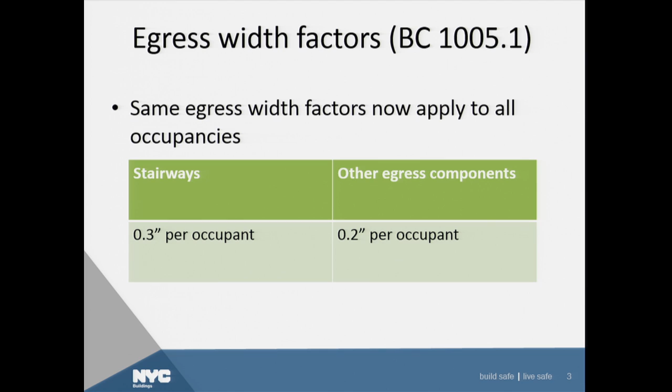So back in 2008, when we did the changes in the code, with the 2003 IBC as the base code, everything was simplified. There were only 2 sets of factors. One set for high hazard occupancies, you have 0.7, and I think the next number is like 0.5 or 0.3, and you have everything else. Well, in the 2009 IBC, it's even more simplified. So now there are only 2 numbers, 0.3 inch per occupant for stairways and 0.2 inch per occupant for other egress components. Simple enough.

Automatic turnstiles were not really clearly addressed in both the 1968 code and 2008 code, but they are very commonly found in a lot of office building lobbies. You'll find them all over the place, basically counting people going in and coming out, but it was never clear if they are really fully legal. So in the 2014 code, we have put in a number of conditions, and we have made it clear that if you can meet all of these conditions, automatic turnstiles can work safely in a building.

So the first requirement is minimum 32 inches for a typical turnstile. That's the width that you measure from 18 inches above the floor and down. And if the automatic turnstile serves an accessible means of egress, then it has to be 36 inches wide, wide enough for a wheelchair to pass through, measured 34 inches off the floor and down. Well, these devices are typically electrically powered. So in case of power failure, there has to be a feature that would allow them to break away. So 13 pounds is the maximum force that you can exert in order to break away these things.

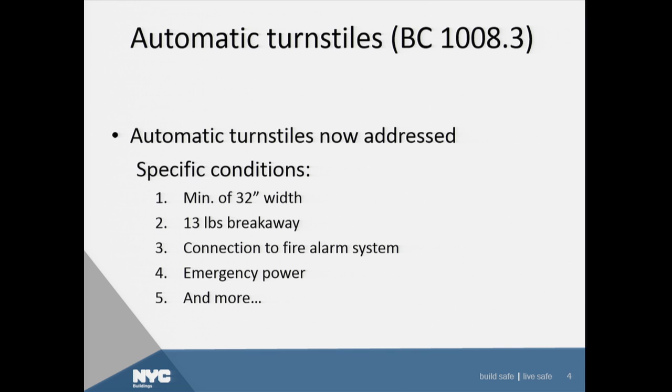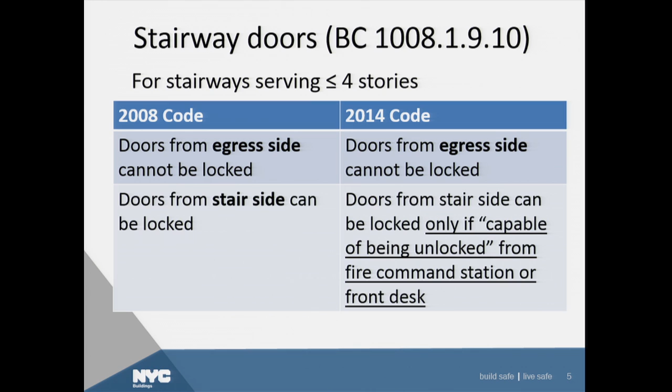However, there's one additional condition. The door from the stair side can only be locked if it's capable of being unlocked from the fire command station, if there's one in the building, or it has to be at a location near the front desk so that the fire department can unlock all these doors when they arrive.

I think James mentioned earlier that there are some handrail requirements in Title 28. So the IBC also made some specific changes to the handrail section. Traditionally, we have what they call the Type 1 handrail, which has a certain diameter allowance, perimeter length, and also dimensional size restrictions, because they are easier to grasp. These are the Type 1 that are allowed for most of the occupancies.

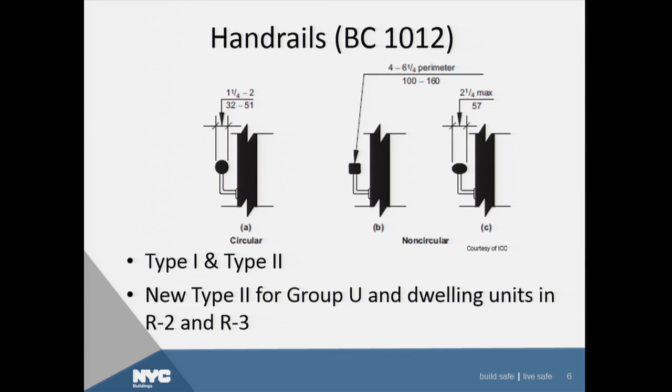But there is now an allowance for what they call a Type 2. Type 2 has a more elaborate profile, commonly found within dwelling units. So they're allowed in R2 and R3 dwelling units, and also Group U utility occupancies.

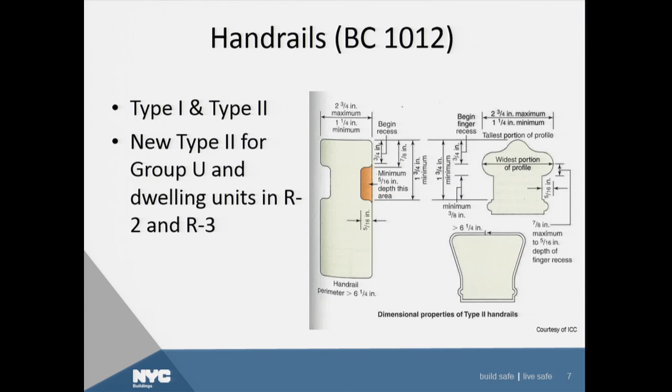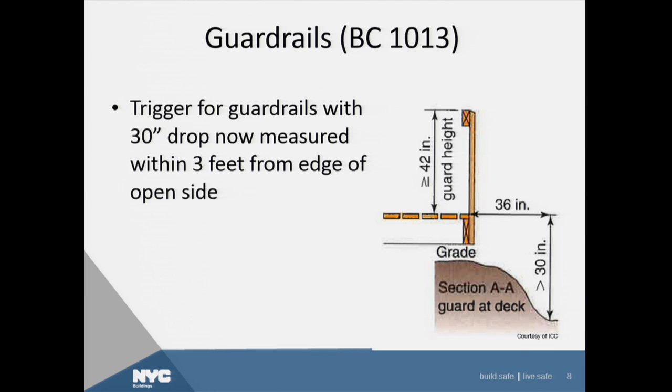Now, before the 2014 code, in the 2008 code, there was already this requirement of having guardrails when there's a 30-inch drop, when you are near a walking surface, a ramp, a landing, a platform, what have you. But it was never clear before how you measure that 30-inch drop. Do you measure right up against the edge of the platform? Do you measure a foot away? Do you measure 10 feet away? So the 2014 code now made it clear that the 30-inch drop is measured within 36 inches from the edge of that walking surface.

Now, I mentioned before that when the Egress Committee worked on this chapter, we also recognized a lot of design challenges and new technologies. This is one of those. It is pretty common when you see a larger tenant, like a mall or a larger mercantile occupancy, within which you'll find a small pharmacy, maybe a small coffee shop. And those spaces typically are serving the same patrons. The assumption is that they're just shopping and having a cup of coffee, and should something happen, they would know where to come back to.

So now there's an allowance for that type of smaller tenant space to exit through a larger adjoining Group M mercantile occupancy, because otherwise the code explicitly prohibits you from going through a next door tenant space to get out of the building. So here's an allowance. There's some limitation. It has to be no more than 10% of the larger tenant. Like I said before, it has to be a Group M. And there has to be a discernible path from inside that smaller space. I would know which door I should take in order to get back into the Group M. And of course, the door can't be locked during business hours, and must be serving the same patrons.

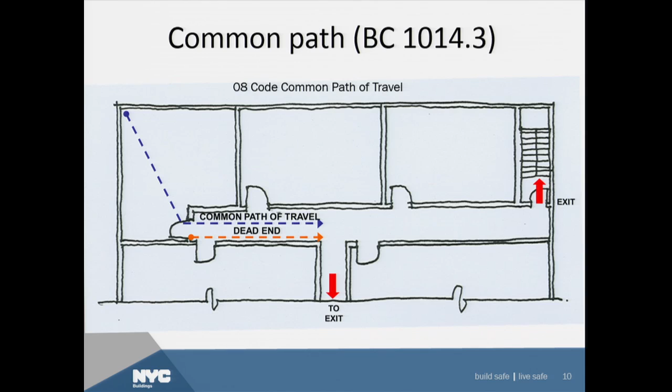By the way, the common path of travel distance is measured to the point at which you can go to one exit or the other. Dead end distance, on the other hand, is where you are traveling in one direction towards an exit. So the two don't really work together. So what we did in the 2014 code is extend that common path to 125 feet for R2 occupancy, provided the building is fully sprinklered. So now the 125 feet common path works nicely with the 80 feet dead end.

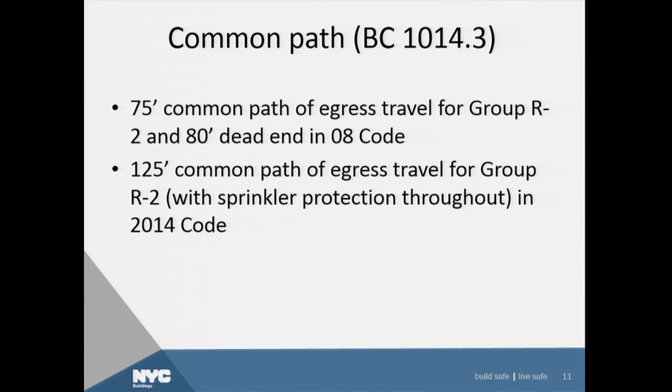The 2008 code required an intervening hall when you are designing an R2 occupancy. The whole idea of the intervening hall is that there is a buffer zone so that when there's a smoke condition, either inside the apartment or in the stairway, one thing won't contaminate the other. So there are some allowances for smaller buildings that they don't have to have the intervening hall. And those exceptions are maintained in the 2014 code.

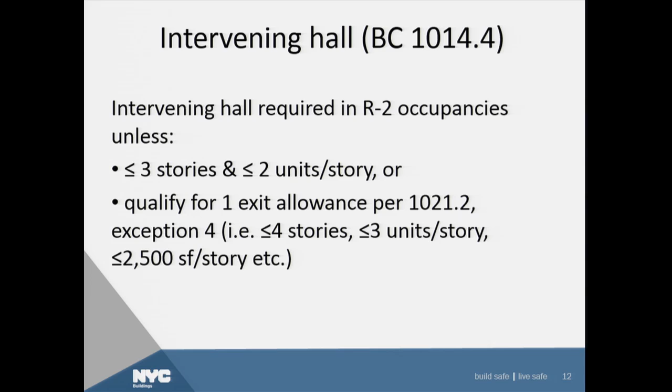So these two bullets here: if the R2 building is no more than 3 stories with no more than 2 units per floor, you don't need an intervening hall. And also, if you happen to qualify for the one exit allowance in 1021.2, which used to be 1018.2 in the 2008 code exception, no more than 4 stories, no more than 3 units per floor, no more than 2,500 square feet per floor, you can enjoy the one exit and you don't have to worry about the intervening hall.

We have added more allowances without sacrificing safety. For most non-high-rise buildings, now you can install smoke and draft control doors in lieu of the intervening public hall. If you happen to pay attention to Marshall's presentation this morning, that's the piece that he mentioned. UL 1784 is the standard. If you can comply with that, then you can do away with the intervening public hall without jeopardizing either the hall or the unit.

For high rises, there are also some exceptions there, but they're not as broad. So if you happen to be designing duplexes within a high-rise building, and on that particular story all you have is the upper floor of duplexes, then there are some allowances that you can enjoy.

Some stairs actually continue all the way down through to the cellar or basement. So when you have a situation like that, the code requires you to actually put a barricade at the level of exit discharge. The idea is that if you are running down the stairs, they don't want you to miscalculate and think, I have to continue down more because this is not the street yet. Well, if you have that barrier, then people would know, okay, this is the end, and the exit sign is pointing to the lobby or to the exterior, I have to get out now.

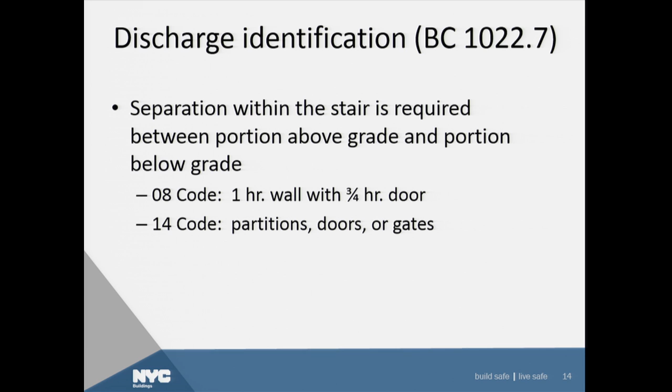So that separation used to be a 1 hour rated wall with a 3/4 hour door. Now in the 2014 code, you can do a combination of partitions with doors or gates. The concept is still there, but it's a little bit more relaxed, and it's actually good for when you are doing stair pressurization.

Now, I mentioned exit discharge through the lobby. Traditionally, you really have to design your stairs in a way that 100% discharge is outside of the building. That's the baseline requirement. However, it's not really that easy to achieve. So the code provides some allowances without sacrificing safety again. Exception 1 in that section allows you to discharge up to half of your egress capacity through a protected lobby. What does that mean, protected lobby? We get that question a lot too. So it has to be sprinklered, the floor is rated, walls are rated. So within that protected zone, people are able to transition through and get out of the building.

There's another exception when you have a small vestibule, and it's really meant to be at the perimeter of the building, and people quickly come into that vestibule space and transition through and get out of the building. Now, those two conditions are not really meant to be combined to achieve 100% through the building exit. So now we made it clear in the 2014 code that you cannot combine the two.

Talking about going through the protected area, the challenge here is that if you have a stair that's coming through the lobby, while you are still traveling to your final exit of the building, the code requires that final exit to be readily visible and identifiable. But that's not easy sometimes because the stair door might not be facing the building exit door. It might be behind me. Or maybe there's an elevator lobby right in between. Or the orientation is not right.

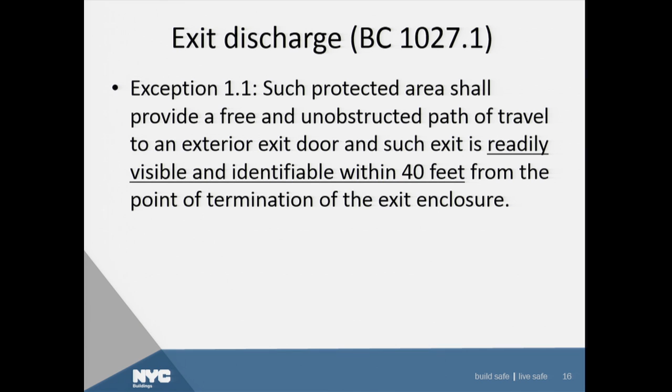So the code now makes it clear that there is a 40 feet allowance. That's 40 feet from the exit door from the stairway, and I have to get to a point within 40 feet where I can see the building exit, and I know where to go.

In the 2008 code, for some reason, the city did not adopt ICC 300, which I believe is something that started with federal requirements in terms of bleacher safety. So when you are designing bleachers as defined in the definition here, bleachers, grandstands, folding, telescoping seating, you're supposed to comply with ICC 300. So this time around, we were able to adopt ICC 300. So in the future, if you're designing these things, please refer to ICC 300 for safety requirements.

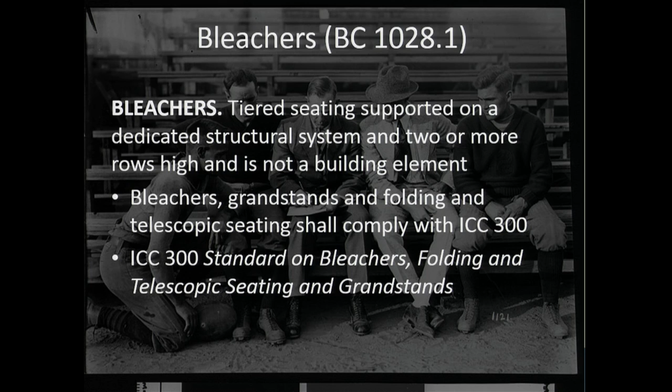Local Law 26 of 2004 requires photoluminescent markings in high-rise office buildings. And then in the 2008 code, we also carried over the photoluminescent requirement and in fact expanded that to cover not just high-rise office buildings, but all high-rises except for R2 high-rise buildings. So by the time we expanded the requirement, we were still relying on the same reference standard 6-1 for the specific installation requirements for photoluminescent marking. And at that time, the light source, the sensitivity of the material used to be 2-foot candle.

Now in the 2014 code, this whole thing is nationalized, thanks partly to James Colgate, who was really a proponent for having these kinds of markings in high-rise buildings, and also NIST because they were pushing for it. So now we have the requirement in the 2014 code still, but we have a new reference standard. The material must comply with either UL 1994 or ASTM E2072. Now the distinction here is that the charging source is a little bit less because the material is more sensitive, so it's only 1-foot candle.

Well, the takeaway is that you should not mix the two materials. If you have a set of materials that comply with RS 6-1, that should not be mixed with other materials that are in compliance with UL 1994 or ASTM E2072.

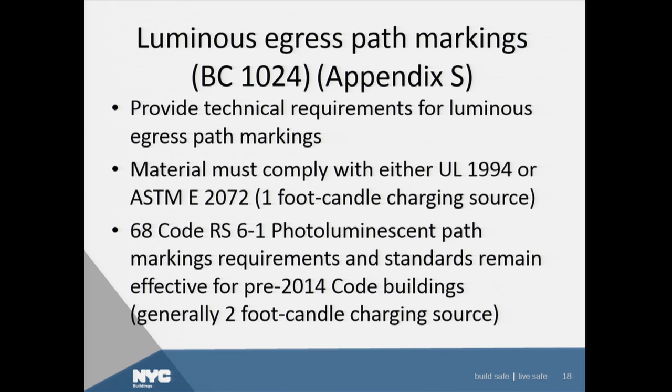Marshall also mentioned this piece before. Automatic hold-open doors. Traditionally, when you have exit stairways with those exit doors, they're supposed to remain closed. We didn't really like the idea of having all those doors open. However, the Green Code Task Force made a recommendation to promote active use of stairways to reduce obesity rates and also to reduce energy use, because every time you press the button to take an elevator, you are consuming power.

So in recognition of that recommendation, there was a local law passed allowing up to 3 consecutive floors having doors on magnetic hold-open devices within a building. And those doors on the magnetic hold-open devices have to be linked to the building fire alarm system. So should something go wrong, if there's a fire, if the fire detection system goes off, the magnet will release and those doors will go back into their closed position.

The next chapter I'm going to cover is accessibility. Also, we have a very great committee here who did a whole lot of work trying to work out all the details in the accessibility chapter. On the national level, I think the ICC also was trying very hard, just like us, to align the chapter and all the requirements with the Fair Housing Act and also the 2010 ADA standards. There's still a lot to do. So all I can tell you is that whatever you see here is the best we can do at this point, and also what ICC can do at this point to align with fair housing.

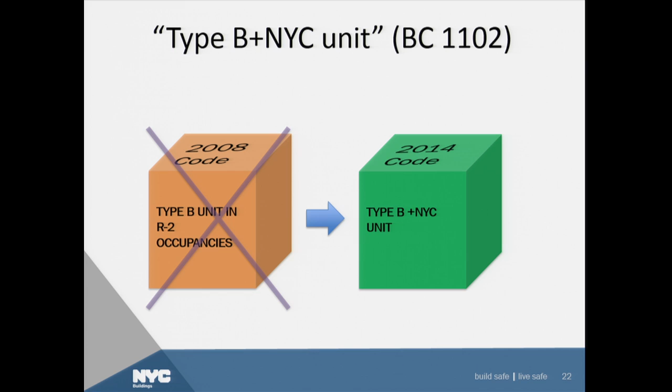When we adopted the Type B unit from the ANSI standard that I just mentioned, that was back in 2008. The Type B unit in the ANSI standard is meant to address fair housing requirements. So when the city adopted that, the city made a number of modifications to further enhance the unit. However, we did not change the term. So there was some confusion as to what the Type B unit means nationally and what the Type B unit means locally. So this time around, we simply changed the term to what we call the Type B+NYC unit.

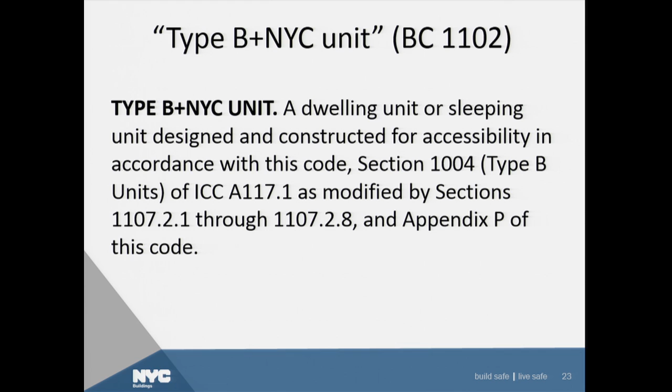So now there's a definition in 1102. The definition is that it's a dwelling unit or sleeping unit designed and constructed for accessibility in accordance with this code, Section 1004, which is what's in the ANSI standard for Type B units, as modified by Sections 1107.2.1 through 1107.2.8. So when people ask, what are those modifications? Where are they? It's actually in the definition itself, so you can quickly go to the relevant sections and find out exactly what that means. And the definition also refers to Appendix P, which I'm going to cover in just a few minutes.

There's a legacy allowance in the 2008 code for flex closet. That's the closet that you put next to your entry doorway, and that's something that you can disassemble when needed. Well, we found out that this allowance is too onerous and nobody really does that anymore. It's difficult to enforce. So now that allowance is out the door.

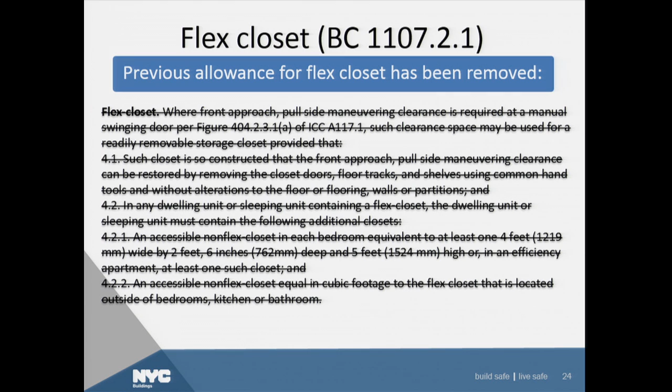There are some items in Chapter 11 that you don't have to provide at the outset. You can actually provide it upon occupancy by a person with disabilities or upon request, 10-day notice. In the 2008 code, we had a few of those. Now, in the 2014 code, we have expanded that concept to 3 more items: operable windows, storage, and hand shower. And I'm going to cover operable windows on the next slide.

So for operable windows, there's a long history of how difficult it is to comply with that item, because it's just simply too difficult to provide a window that will withstand the pressure difference between the interior and the exterior, especially when you're in a high-rise building. There are also limitations; your window will have to comply with the energy code. There's also wind load and all that stuff.

So we have heard from the industry, and we have made some adjustments and clarified exactly what needs to be done to operable windows. So now there are two sets of rules. One set of rules applies to Type B+NYC units, and another set of rules applies to accessible units. Accessible units are the ones that, for example, you will find in a hotel room. There is a percentage of hotel rooms that are supposed to be fully accessible to people with disabilities.

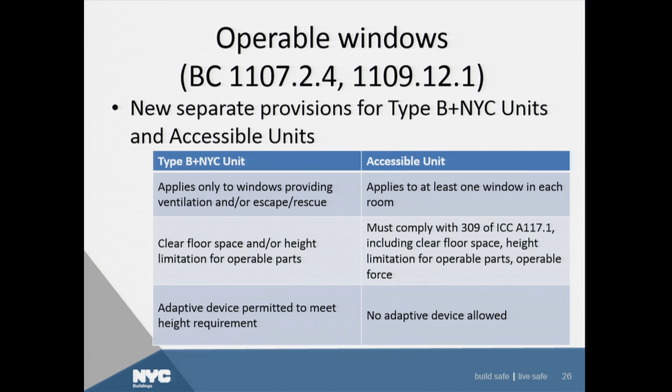The United States Postal Service, USPS, has been trying to work out the differences with US HUD as to exactly what's required for mailboxes. Now, the USPS had a set of rules about exactly how high you can mount these things and how low you can mount these things. That happened to coincide with US HUD's requirement based on fair housing, how low and how high you can mount these things. So until they can reconcile the differences, at this point, the only range that you can provide these mailboxes at that can meet both the USPS requirements and the fair housing requirements is between 28 inches to 48 inches above the finished floor.

Now, if you already printed your handout a few days ago, when you look at this slide, slide 28, please make a correction because there has been an error in our 2014 code online version. Please cross out I-3 occupancy. And also, I think it referred to 1107.5.6 or something. Cross that out. This section only applies to I-2 occupancies.

So what happened here is in the 2008 code, for I-2 occupancies, the requirement was so straightforward that 100% of the units must be accessible. However, in recognition of the targeted occupants, typically they don't really have severe mobility impairment. I'm talking about occupancies in convalescent, enriched assisted living residences, and special needs assisted living residences. These are the types of residences that are typically recognized by New York State.

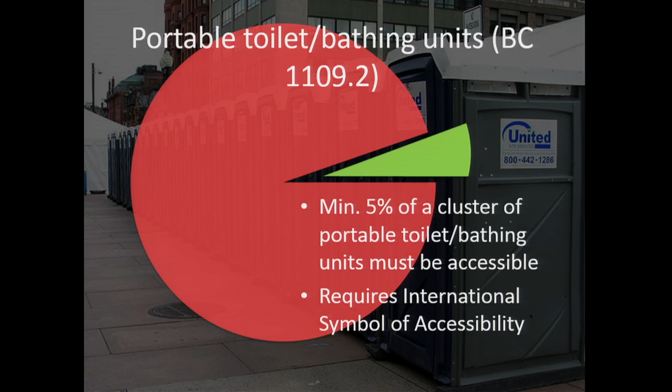This is another terminology issue. We used to call them unisex toilet rooms in both Chapter 11 and also Plumbing Code Chapter 4. But unisex toilet rooms are really meant for when you are not required to have separate sex facilities. So if you have a really small restaurant having, say, 25 people, we would actually allow you to have one unisex bathroom serving both sexes. No need to separate the two sexes, to have two separate toilet rooms. So unisex rooms are meant to address that.

In 1109, in Chapter 11, for a larger assembly occupancy and a very large M occupancy, besides what's required in the plumbing code in terms of plumbing fixtures, there's an additional requirement for a standalone family-type assisted use toilet room. And the whole idea is that someone from the family can assist another member of the family in privacy inside that room. So now we have two distinct terminologies for each one.

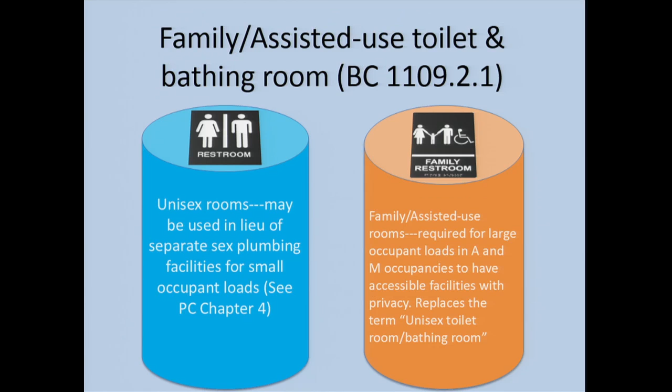Now this is the fun part. If you haven't been paying attention, please pay attention now. Drinking fountains. A lot of changes have been made in that section, because back in 2008, the requirement was very simple. Half of your drinking fountains will have to comply with accessibility requirements.

Well, in the 2014 code, also in the 2009 IBC, also in the 2010 ADA, there has to be a high-low fountain requirement. So what that means is that for each fountain, you have to have one high, one low, or a combination high-low. What does that mean, high-low? The high one is supposed to be used by people who are standing. The low one is supposed to be used by people who are wheelchair users. So one high, one low, or one high-low combo.

But if you're required to provide two fountains by the plumbing table, you are also doing one high, one low, or a high-low combo. It's recognized as two fixtures. So if you are doing 10, essentially you can do 5 high, 5 low, or 5 high-low combos. Now, some of you might be looking at this picture and frown like, what's going on here? Something is missing. Where is the bottle filler faucet?

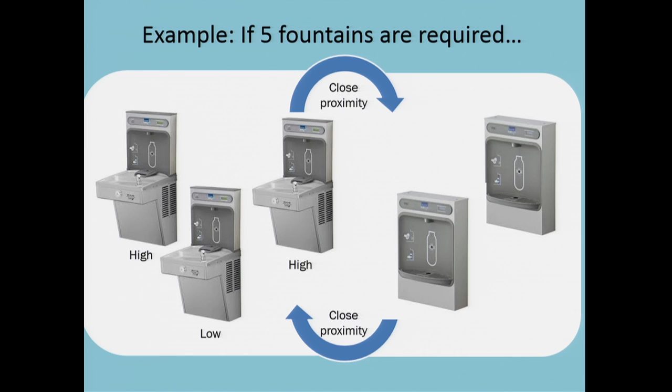2 of them, which is up to 50%, can be the standalone type without the drinking spouts. The other three will have to have the drinking spout, but they must comply with the high-low requirements. So you see 2 high and 1 low. You can also do 2 low and 1 high. It's not rocket science, right? One thing I have to mention, and I have not yet mentioned, is they have to be in close proximity so that I don't have to hunt for it or someone doesn't have to hunt for it.

LULA elevator: limited use, limited application elevators. These are the types of elevators that are really meant to go up a few stories. And the whole idea is that it's space saving. The machinery is a little less bulky, so a lot of people want to specify that. So in the 2008 code, we used to allow that for new buildings, provided that it's no more than 10,000 square feet. Well, we found out that the ADA might not like that, so we have to remove that allowance.

But you can continue to specify LULA elevators for prior code buildings. And it's the same criteria, no more than 3 stories and no more than 10,000 square feet. And also, if you are allowed to provide a lift, a vertical platform lift, or inclined platform lift in your building, you can use LULA as a substitution as well.

Now, there are situations when you design a Type B+NYC unit that there are more than one same fixture, meaning you have 2 lavatories or 2 water closets or maybe 2 tubs within that same bathroom. So in recognition of that, we are going to allow the secondary fixture to comply with the more relaxed set of rules, which is in the ANSI standard, the Type B Option A.

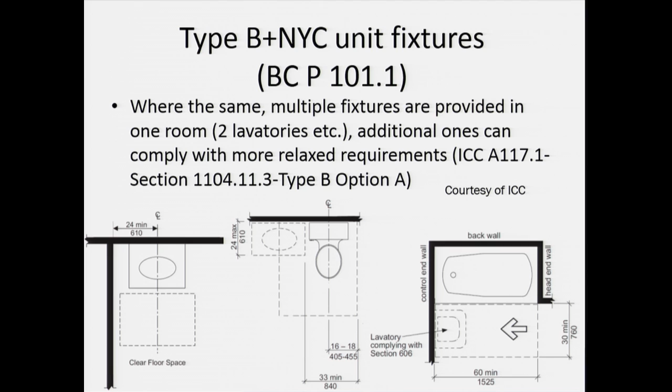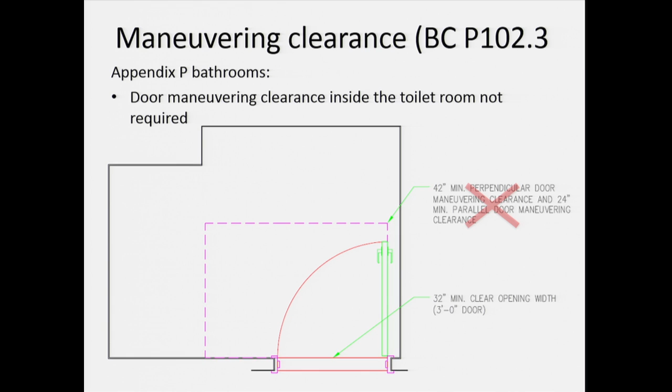And also, because we recognize that we have already put in a lot of requirements in the Appendix P bathroom, and the space is very usable, there was a decision made that the door maneuvering clearance inside the bathroom is no longer required. It can be taken away. However, the reversible door piece is no longer allowed.

The reversible door concept came from Local Law 58 when we said, well, when you're designing your bathroom, you can design it in a way that in the future, the door will swing the right way, providing the necessary clearances for the wheelchair user. So that idea was carried over into the 2008 code, and we are going to stop that in the 2014 code because of fair housing requirements.

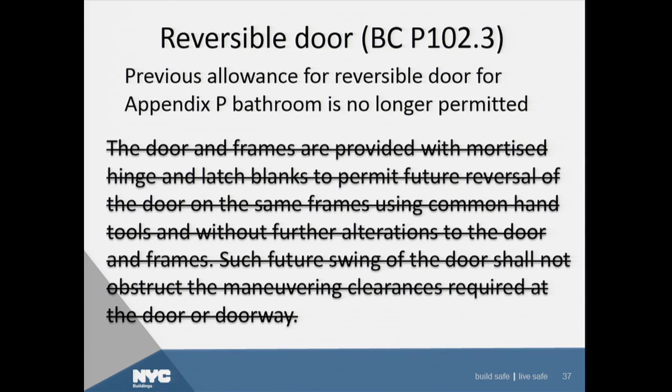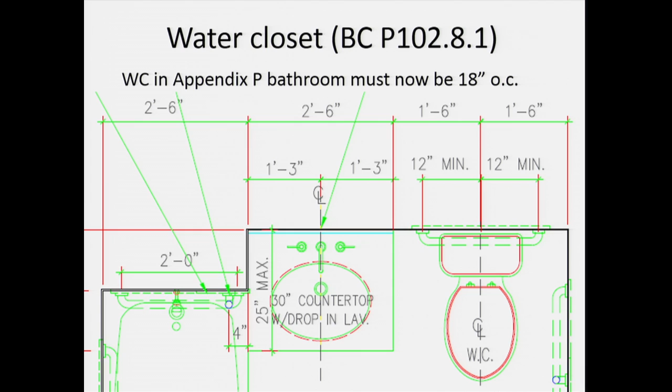And also, the US HUD is asking that the water closet within the bathroom has to be precisely at 18 inches on center from the side wall. So there's no longer an allowance of between 16 to 18 inches to mount that water closet. And this is based on their requirement under fair housing.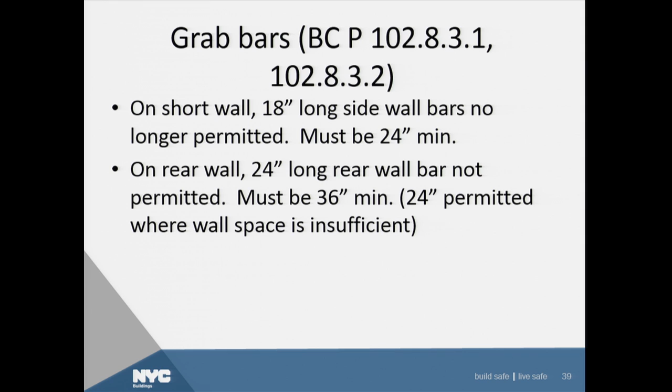So finally, I'm going to touch on the issue of window guards in Chapter 12, Interior Environment. Section 1203.4: in Chapter 12, you'll find information about your window, the required amount for your ventilation and light. And I think typically it's 6 square feet of operable surface. So that 6 square feet is provided by design.

However, you're allowed to provide window stops at the outset so that the window cannot be lifted up higher than, I think, 4.5 inches. That window stop can be removed upon request by the tenant occupying the unit. But at that point, when the window stop is removed, there have to be window guards put in place. And recently, we have heard on the news of some unfortunate events.